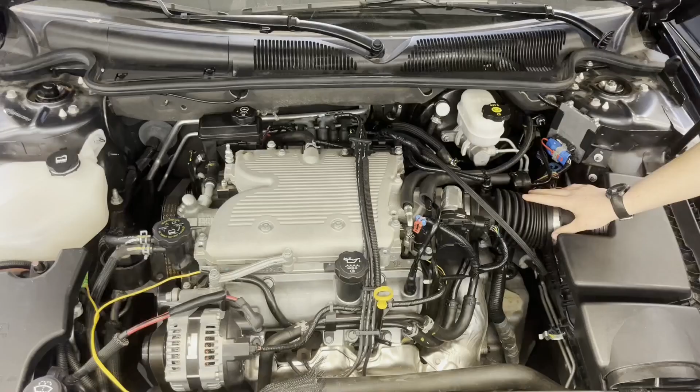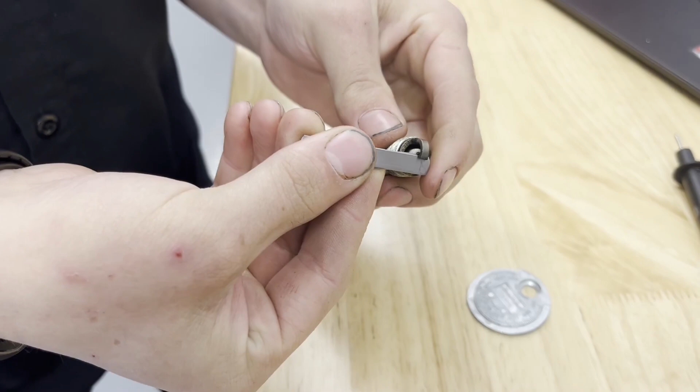We're working on this 2011 Buick Lucerne. We're going to be looking at the ignition system today. So we pulled out a spark plug. The plug out of this car is an AC Delco Iridium plug. It calls for a 40 thousandths gap, and that's just exactly what we have here.

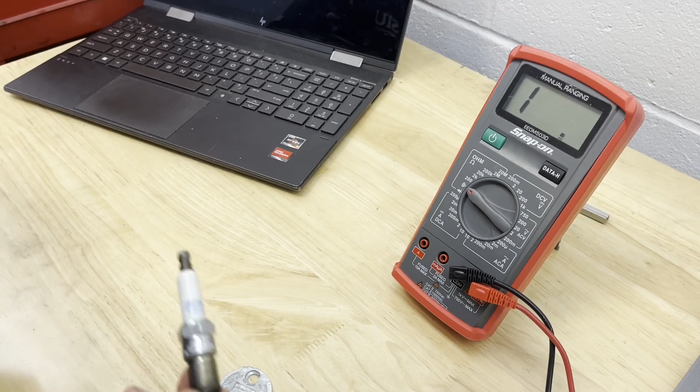We're also going to go ahead and test the resistance. Right now we're just set to continuity, and we can see that there's no continuity through this plug, meaning there's a gap instead of a resistor.

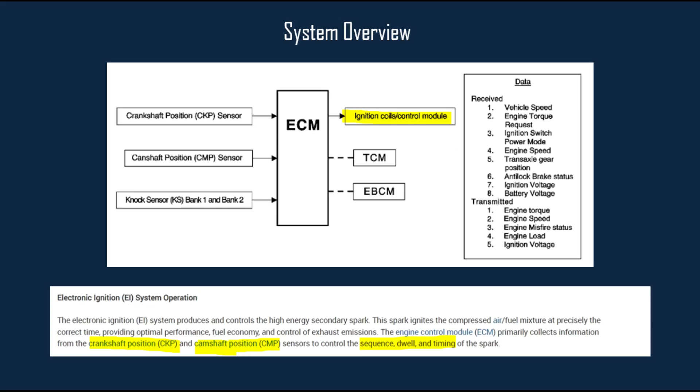We're now looking at the system overview. This is an electronic ignition system where the ignition module receives input signals from the PCM, primarily crank and cam position sensor signals, and interprets these and transmits a secondary voltage while regulating the sequence, dwell, and timing of this spark.

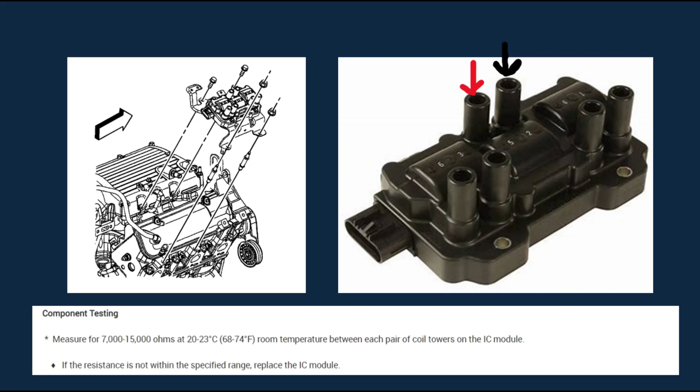Here we have the ignition control module and coil assembly. You can see it's located on the back side of the engine above the valve cover. It's not possible to test the primary coil resistance through the module, but the secondary coil resistance can easily be done. Placing your meter leads on the coil towers as shown in the picture with the arrows, you are looking for 7 to 15,000 ohms. The secondary coil resistance results are all right about 10,000 ohms.

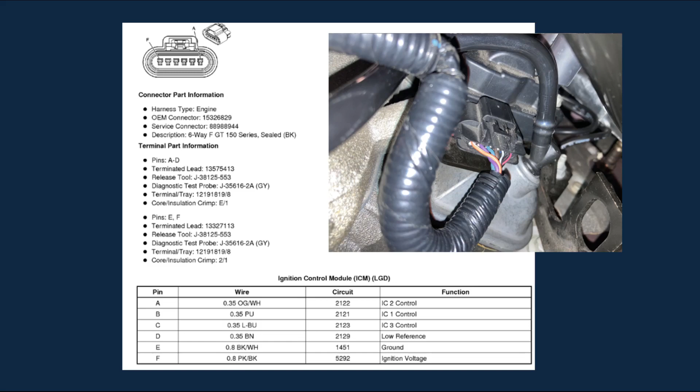This is the ignition control module connector and pinout. We have our first channel of the Pico onto our ignition control 1 circuit, the purple wire and the connector going to the module. And we have our voltage paddle reading our 1 and 4 coil, which is triggered off of that ignition 1 control circuit.

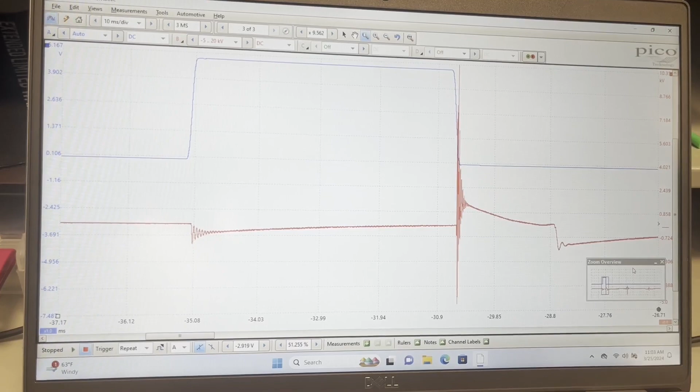Alright, so on channel A, we have a 5-volt signal for the ignition coil 1 from the PCM into the ignition module, and signal B is our voltage from our coil 1-4. And so here we see the dwell time, we see the fire and the firing line, and then going back down.

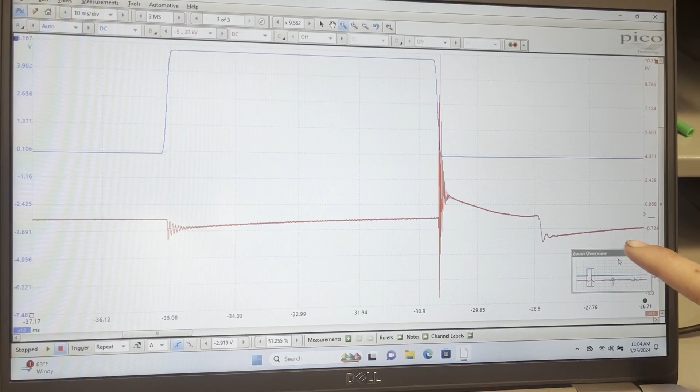Looking at the ignition coil operation description, we are able to break down the PicoScope readings even further. First, in the yellow, we have the ignition control circuit on. That is our 5-volt signal on the purple wire telling coil 1 to fire. See in the yellow, that is the 5 volts turning on. Next, we have the current flow through the primary coil windings in the green. And that is our dwell time. That's the saturation of the primary coil.

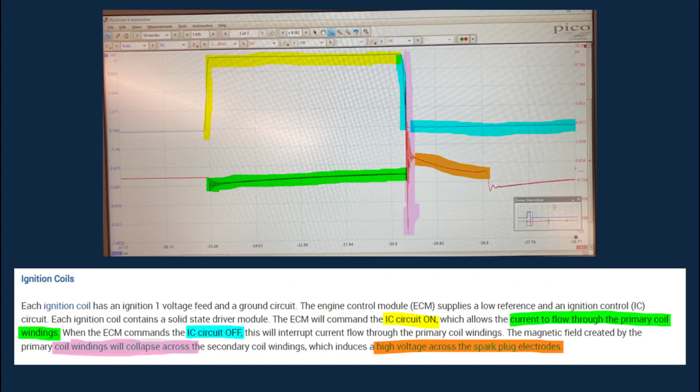Next, the ignition control circuit turns off. That is the blue. And immediately after that, the pink happens. That is the collapse across the magnetic field, causing the voltage spike. And that will internally cause the orange, which is the firing line, and that is the high voltage crossing the spark plug gap until it can no longer provide enough voltage to cross the gap.

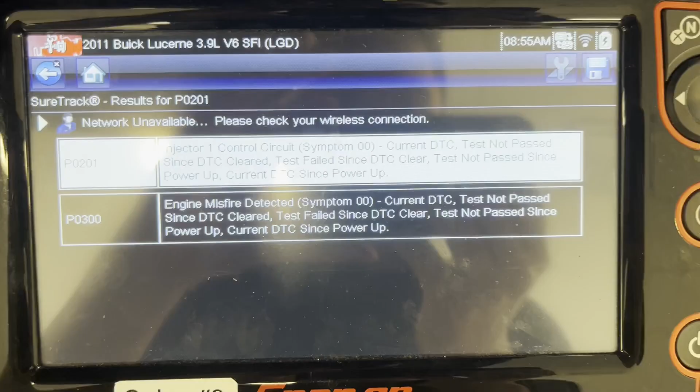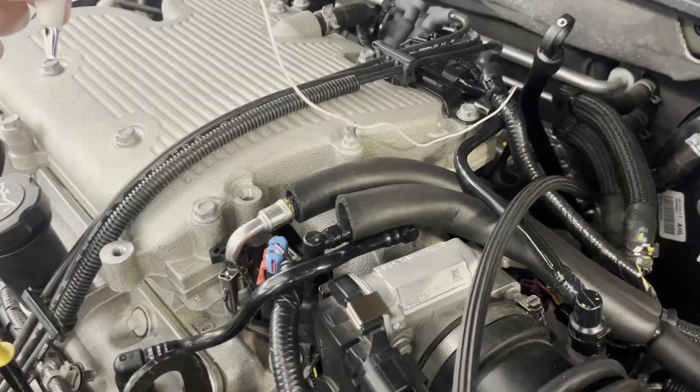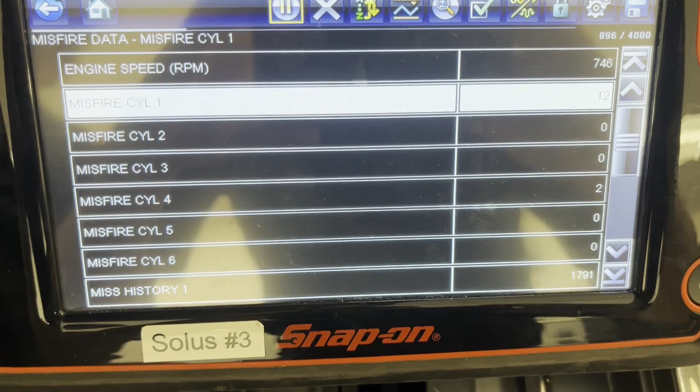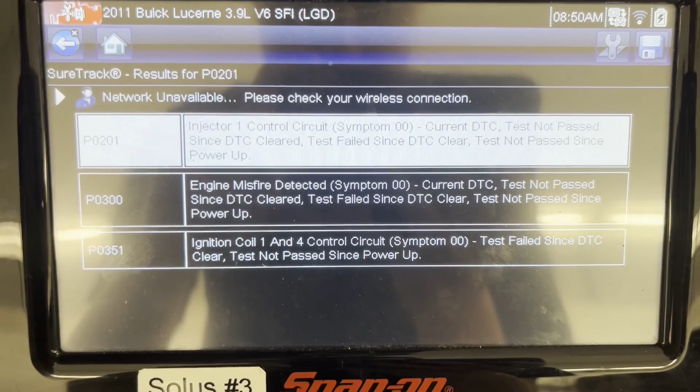These top 2 codes were present before the test, but we have a new code here on the bottom, P0351, which is a very specific code. You can see we caused it. It is the ignition coil 1 and 4 control circuit code.

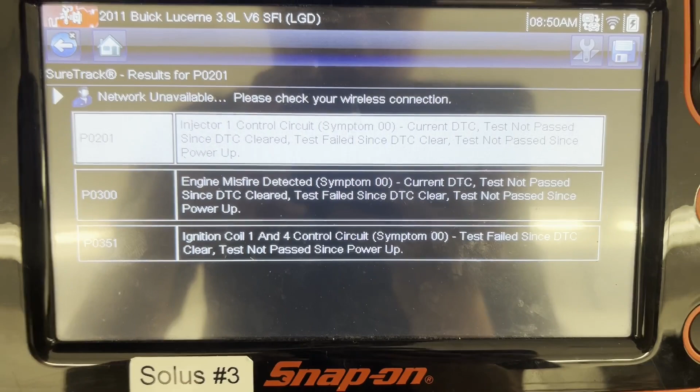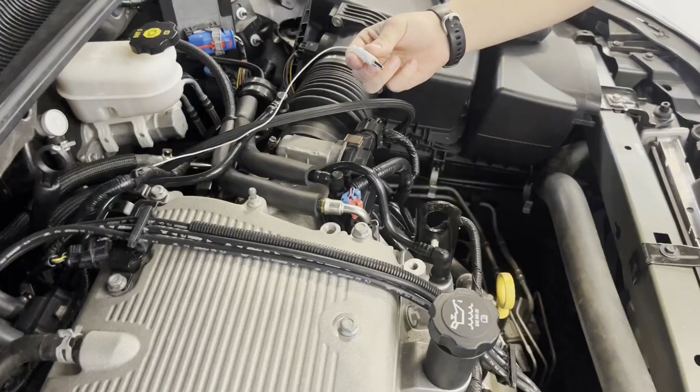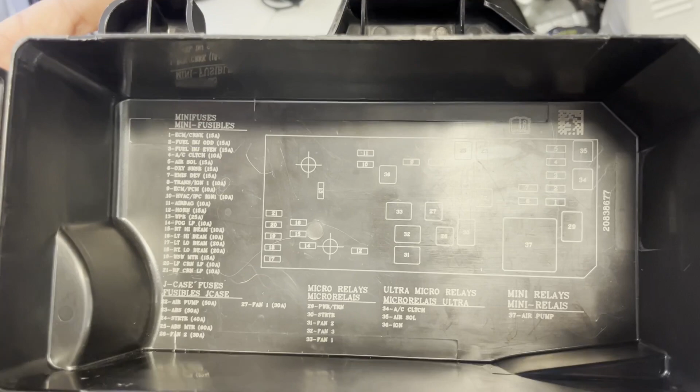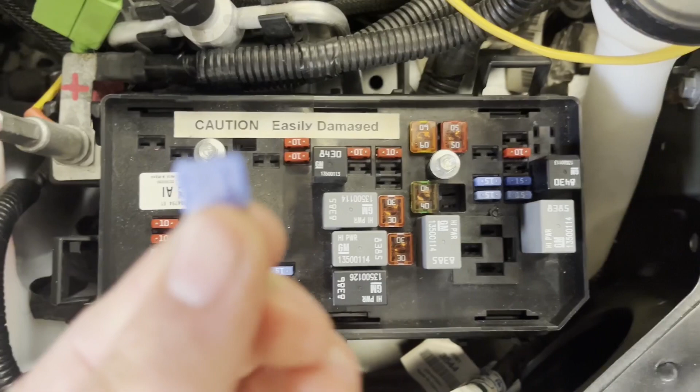After the car died, it would not start upon cranking. Alright, this led us to mini fuse number 3, fuel injector even 15 amp fuse. Taking a look here, it is blown. The bug did not set a DTC, although it prohibited the car from starting. This concludes our ignition system investigations on this 2011 Buick Lucerne.